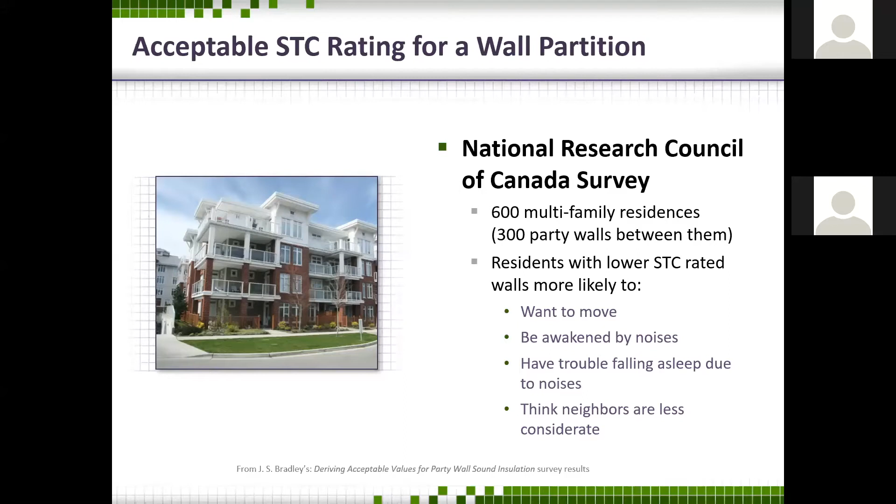The general survey conclusions found that an STC of 55 is a realistic goal, but an STC of 60 is more ideal and practically eliminates negative effects of noises from neighbors.

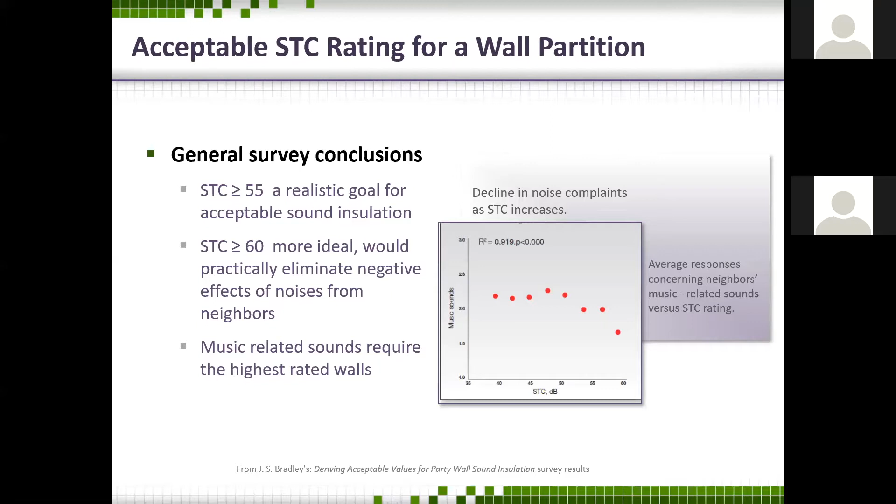So some of the trends are towards higher STC wall partitions. In education, LEED requires an STC 50 for core learning spaces. We know that children learn better with fewer distractions, and adults do as well.

In healthcare, we passed the HIPAA law in 1996, and it completely changed the way healthcare facilities are designed, and it also placed a greater emphasis on sound transmission.

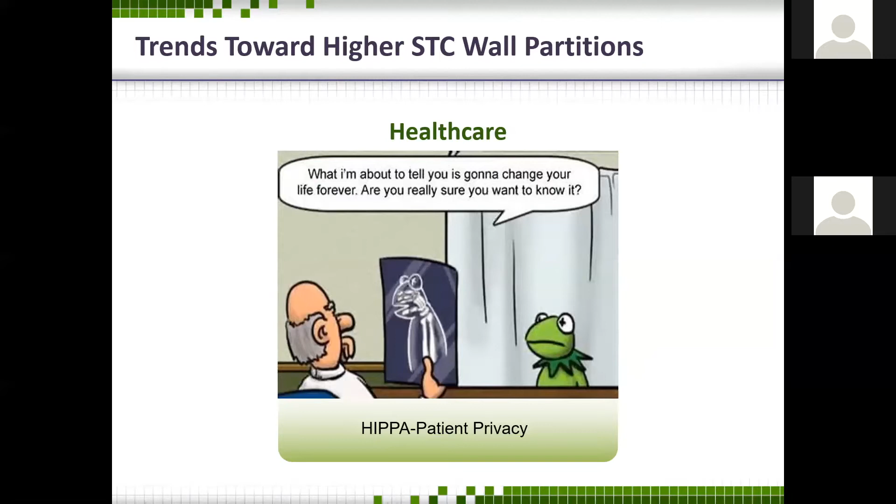The hospitality industry is a very competitive industry, and one of the ways they differentiate themselves from one another is to provide a quiet environment.

I think probably many of you, like our team, traveled a great deal before COVID-19. One of the things I always looked for was a quiet room. If I could hear that television, that flat screen in the room next to me, or people talking, I wouldn't go back to that hotel.

So the key acoustical terms and concepts we're going to talk about: structure-borne sound, airborne sound, Hertz, decibels, flanking sound, sound transmission or STC, and noise reduction coefficient or NRC.

Structure-borne sound is not really what this presentation is about. Structure-borne sound is sound that travels from a source to a receiving space, primarily by solid materials, and it travels much faster than airborne sound.

Our team visited the acoustic lab at NGC Testing Services and experienced structure-borne sound. We stood in a room. Above us was a concrete floor ceiling assembly, and on that floor was a tapping machine. When they turned on that tapping machine, you could hear that sound just like it was next to us.

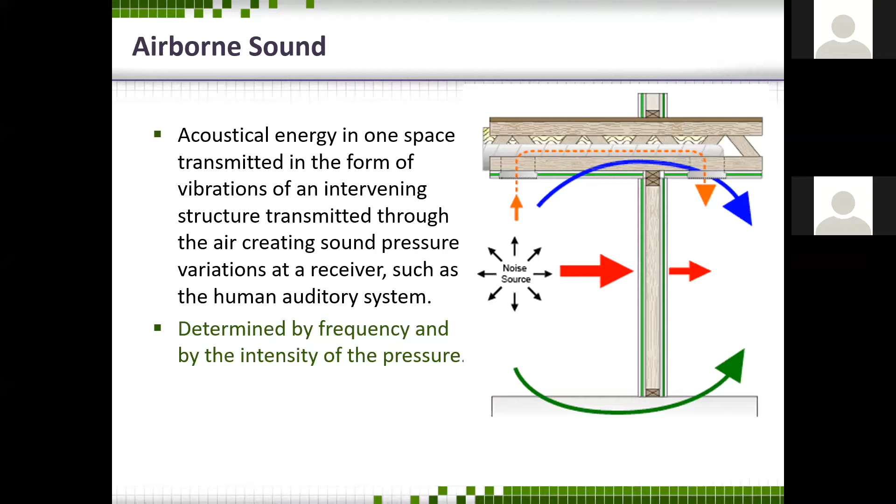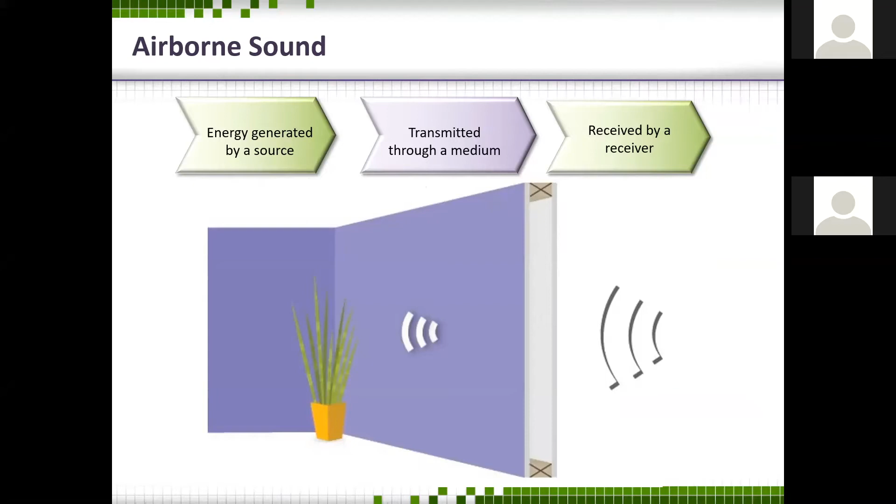The way we hear that sound is by frequency. Here we mean pitch, and intensity of the pressure, or how loud it is. So it's energy generated by a source, transmitted through a medium, and received by a receiver.

The most common measure of frequency is called a Hertz. When we're very young, healthy children, we can hear between 20 Hertz and 20,000 Hertz, but that goes away pretty early. We know that people who are 30 years old and older, the vast majority do not hear 16,000 Hertz and above. Humans are most sensitive to the range of 100 Hertz to 8,000 Hertz, and most typical speech patterns are between 125 Hertz and 4,000 Hertz.

And this is the range that we test for STC. If that sound is below 125 Hertz or above 4,000 Hertz, STC isn't testing for that. Now, 125 Hertz is similar to the low sounding feedback on a monitor, and 4,000 Hertz is similar to that shrieking feedback from a microphone.

The next slide we're going to show you is a very fun video from National Geographic, and it illustrates how quickly adults lose their ability to hear those higher frequencies. You may want to play along and test your own hearing.

We've gathered a group of volunteers ranging in ages from 8 to 71 and are putting them to the test in our first Battle of the Ages contest. All right, you guys, I'm going to play a series of sounds, and if you can hear the sound, I want you all to raise your hands up. Your right hand, you're going to keep it there, all right? For those of you watching at home, feel free to play along. Ready? 8,000 Hertz. All right, all of you can hear that first frequency. Now I'm going to play another sound in another frequency. If you still hear it, keep your hands up. If you can't, bring your hand down. 10,000 Hertz.

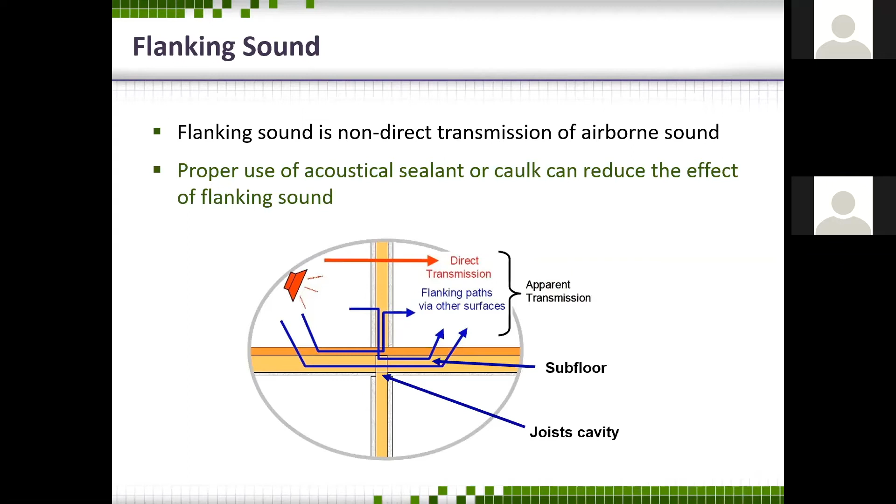So flanking sound. Flanking sound is the non-direct transmission of airborne sound, and the proper use of acoustical sealant or flexible caulking can reduce the effect of flanking sound. We're talking about places like the subfloor or joist cavity. You want to make sure it's a flexible caulking, because as that building settles, you don't want to create gaps where there could be sound transmission.

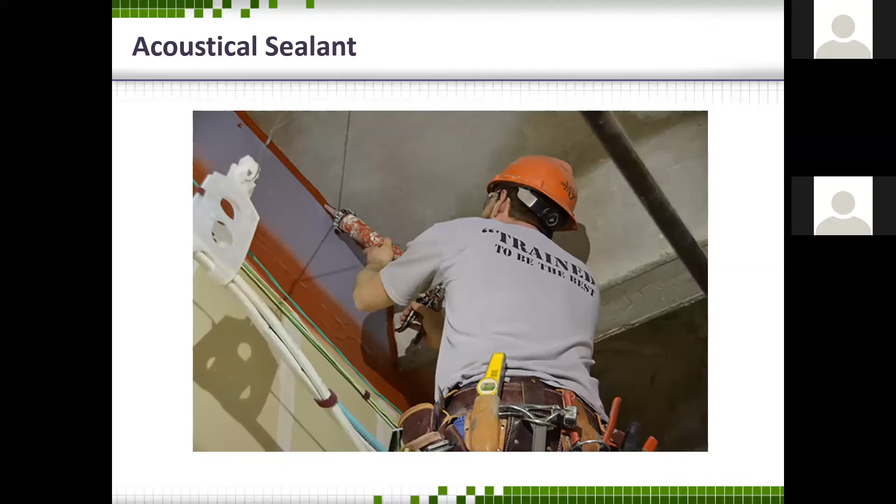So in areas like the perimeter seal, the photo shows a worker applying fire-resistant acoustical sealant around the perimeter of a wall. Thad is going to talk about this more in coming slides, and also at the top of a wall.

So Pat's done a good job of outlining sound transmission classification. Let's dig a little deeper into what it actually is. An STC number is actually a single number. It's a point on a graph in an arc that measures 16 different frequencies, as Pat said earlier, between 125 Hertz and 4,000 Hertz. So if your client or owner is working on a project that's got sounds outside this range, STC really doesn't mean as much as it does when we're talking about normal speech patterns and the way things happen.

Remember also that it's logarithmic, not linear. So again, the lower you are on the graph, a 32 or a 34, that's relatively easy to achieve. When we get up into the 50s, the upper 50s, into that 60 range, we're really creating a heavy lift.

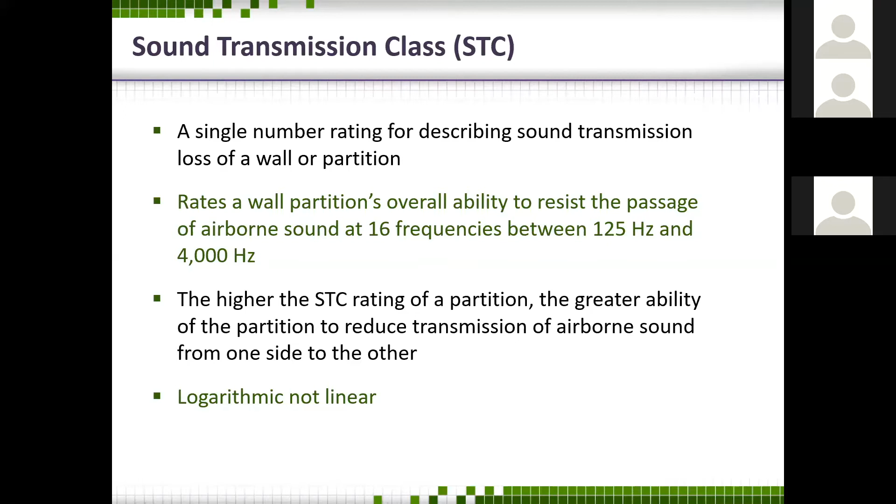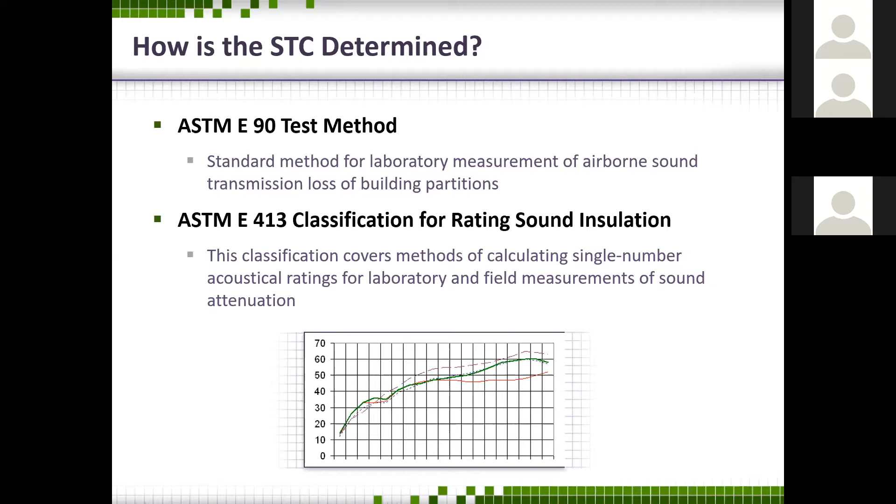From a perspective of how we identify and measure these products, we want to make sure we're comparing apples to apples. So in your specifications and contract documents, please call out products from a sound perspective that are measured by ASTM E90, so we know that all the products you're comparing have started from the same point. And as far as how they're measured, ASTM E413 is the way we classify those within that graph.

We talked a little bit about IIC, we talked a little bit about STC. We're going to spend a minute on NRC - that sound that's built up within a space, the noise pollution that happens within the walls that you're in. For example, we normally give this presentation in a conference room. Conference rooms are designed with typically carpet or softer materials on the floor, the side walls, maybe even a ceiling tile. You've got bodies in the seats, cloth seats as a rule, something more comfortable for a longer period of time to sit for an hour or so to listen to a presentation like this. Sound in those areas is designed to bounce back and forth 2.5 to 3 times before it dies out.

That's exactly right for auditory presentations. Now, let's say you were talking to somebody in that particular room and you moved over to a bathroom in the office. When you move into that space, those walls are typically hard surfaces designed to repel water and protect against water. At that point, your voice is starting to bounce back and forth 6 or 7 times before it dies out.

It might even create enough of an echo that someone would say, "Where are you at all of a sudden? You sound different." This can happen inside a building. It can happen outside of a building.

So we've got a small video here to show the effects of what can happen outside a building when we have NRC challenges. And we're going to use one of the most famous speeches that I think has ever been made by a sports figure.

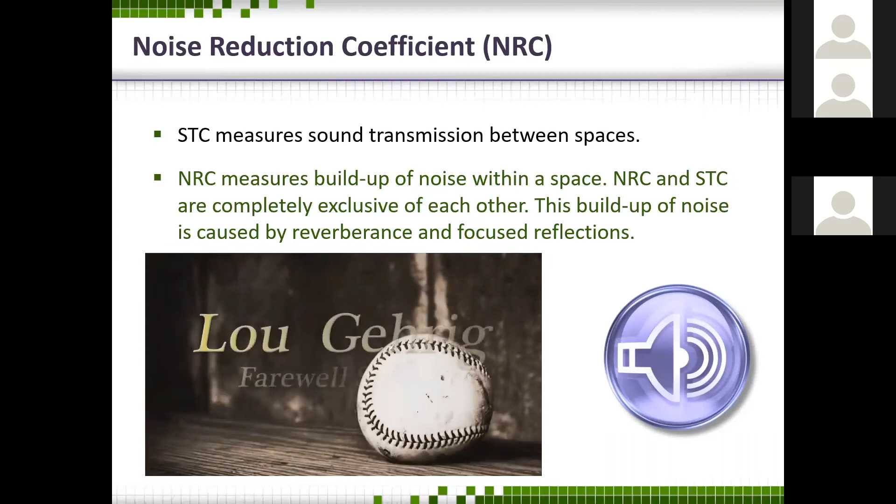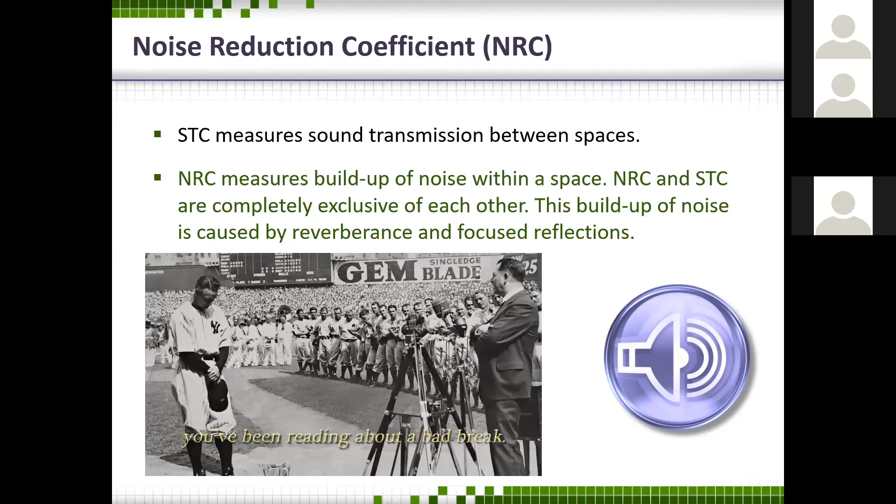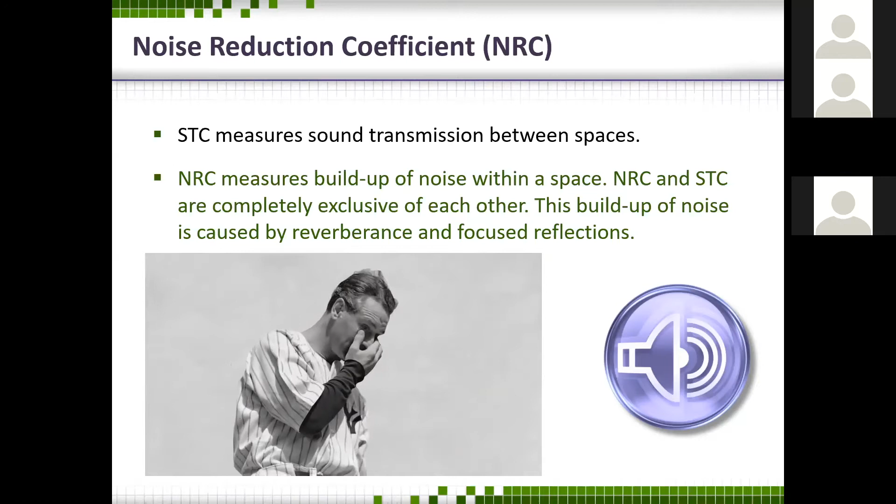For the past two weeks, you've been reading about a bad break. Today, I consider myself the luckiest man on the face of the earth. That I might have been given a bad break, but I've got an awful lot to live for. Thank you.

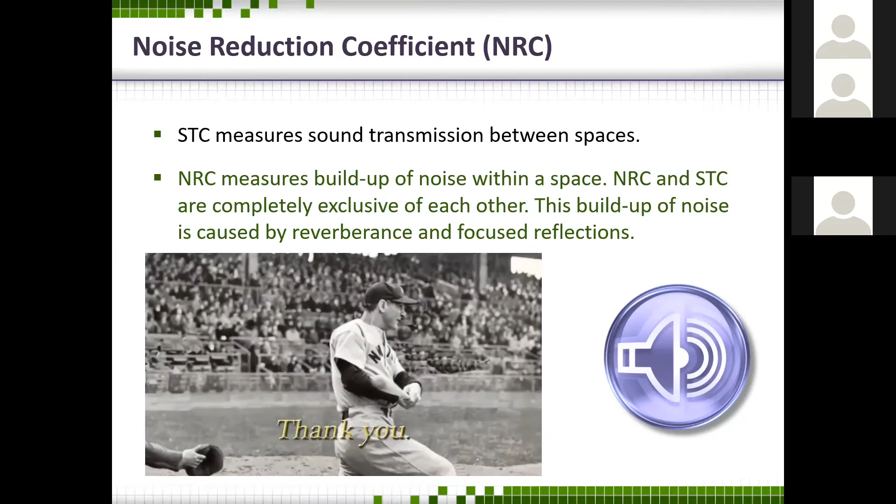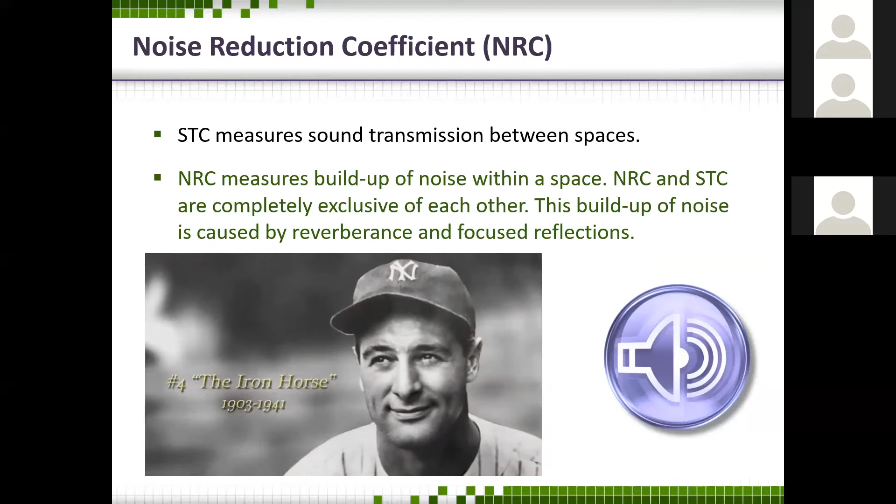Gehrig was one of the most famous Yankees in a long line of famous Yankees to ever live. And if you're not familiar with what happened to him, he got ALS disease and had to retire at an earlier age. He did everything he did with grace, including deliver this final speech.

So I'll give a shout out on the East Coast to all of our New York members. And I'd be remiss if I didn't at least talk, since I've got Pat on the line, and remind everybody that the Dodgers won the series.

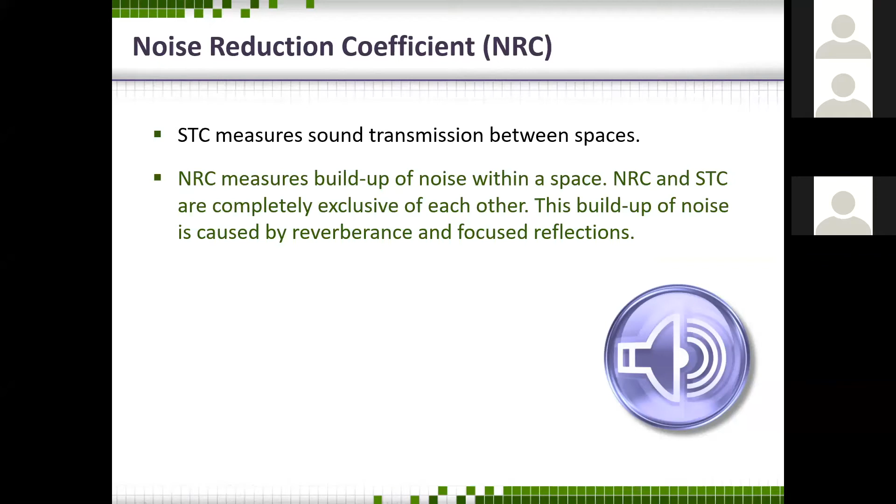So as we talk about design considerations, we're going to move to the part in the presentation where we talk about how we protect spaces from one another.

When I give presentations in downtown Chicago, for example, if I'm in an office where the L is moving across that room at some point, it's kind of hard to change that public transit system. We're not going to eliminate that noise. So how do we deal with that?

Well, you can employ materials that absorb sound rather than reflect it. While that's not huge for STC, it does help reduce the volume of sound as it hits the wall, which can help slow things down.

When we have design considerations, we also use a topic called sound masking. An example of that is, let's say you're in a hotel room like Pat talked about earlier, and you can hear the low thump of that, maybe that movie that somebody's watching on the other side of the wall.

Many of the HVAC units have a constant fan mode, and you can go switch that on, and that constant hum of that fan can drown out the noise from the other side. That's called sound masking. And as adults, we typically can get accustomed to that sound and maybe even fall asleep to it.

Then sound barriers is probably the most common way that we think in the architectural community about how we control sound from one side to the other. And that's basically creating something that goes in the way to slow the sound down.

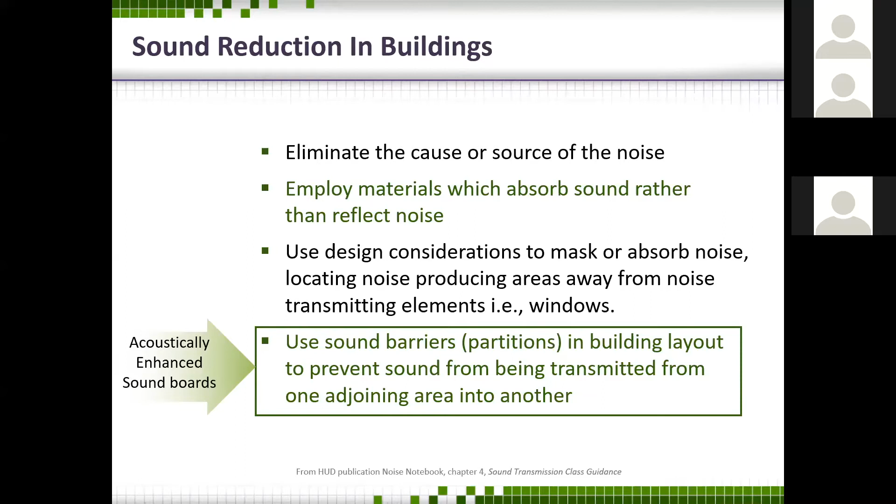Now, there are three things that control sound: mass, stiffness, and damping.

Mass, pretty simple. I do presentations, like I said, in Cincinnati, downtown Chicago, areas where maybe there are buildings that were built pre-1900 that used two and three courses of block, brick, and they'll actually slow things down. It's almost like a tomb when you get into some of those areas, because you've got mass, a tremendous amount of mass holding whatever sound bounces around that room from getting out to the other side.

When we talk about a drywall partition, there are some unique factors we need to consider when we think about how that sound travels from one side to the other with the mass products that we're using in today's world.

A 25 gauge metal stud, 24 inches on center, does a couple things. That 25 gauge stud is soft enough and resilient enough that when sound vibrations hit it, they'll move a little bit and they'll start to deaden that sound out as it moves from one side of that partition to the other.

When we move to a stiffer stud, let's say a 20 gauge stud, 16 on center, instead of 3 contact points in that 4-foot space, we have 4. Think of thermal bridging—there are just more opportunities for things to travel through it. And because it's stiffer, the sound tends to telegraph more easily. So understand that a 16 on center wall that's 25 gauge, or a 24 inch on center wall, will far outperform a 16 on center stud wall.

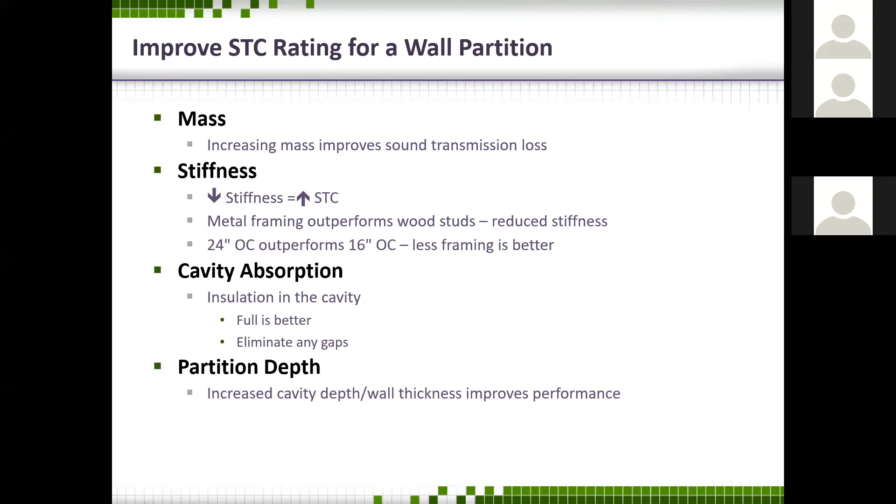And then dampening is a little different—we'll talk about it more later in the presentation, but for now, think of it like this: you have an empty wine glass, you ping it and it rings, and you put your hand on it and it stops. That's essentially what a damped panel does.

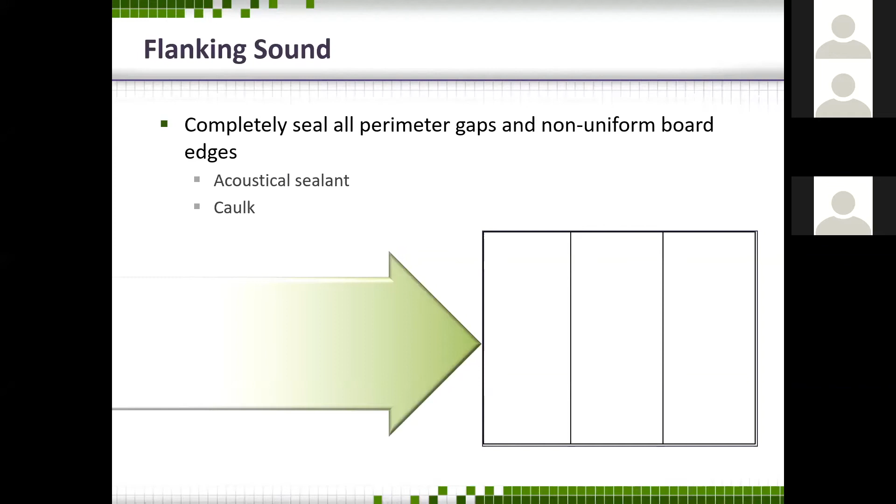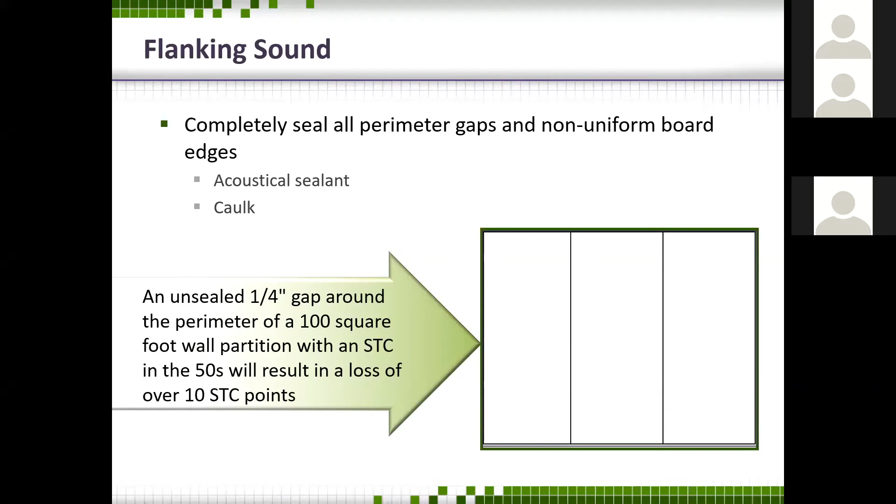As Pat talked about, showing some of the different flanking paths, your system is only going to be as effective as its weakest link. In many cases that can be a window or a door, but even in a solid wall, you still have the opportunity to lose over 10 STC points if it isn't acoustically caulked correctly.

One of the most common areas of misdirection between the person putting up the drywall and the person putting up the floor trim is who's actually responsible for installing the bottom part of that trim. Traditionally this isn't something the drywall contractor or Division 9 contractor is asked to do. GA 216, the Gypsum Association's document, asks that we keep drywall off the floor so we don't wick water or have moisture issues. By the same token, once that drywall is done, we're far from finished with that unit or part of the building.

There's going to be a lot of other trades walking around, floors that need to be swept or cleaned up regularly, so putting a non-hardening acoustical sealant in there isn't probably in your best interest at that stage. But before the trim goes up, that's one piece of the puzzle we need to solve, because sound will pour underneath that wall if we haven't done it. This is an excellent best practice.

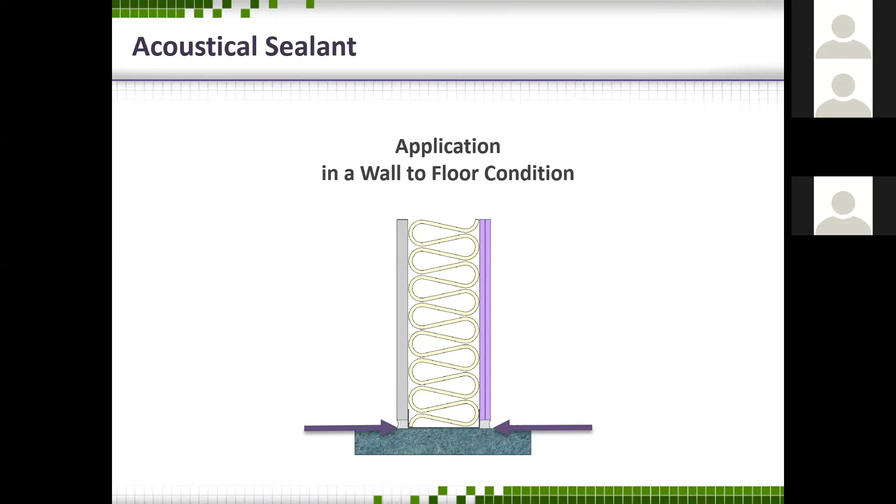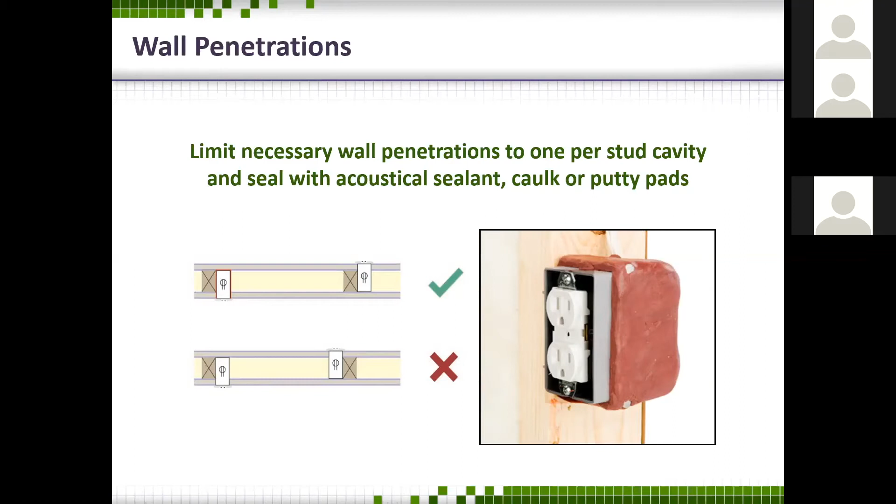One additional way to help control that is to wrap the box with sound putty. The putty pads are relatively inexpensive. Here we have a marketing picture of one that's very well put together. It just looks really nice.

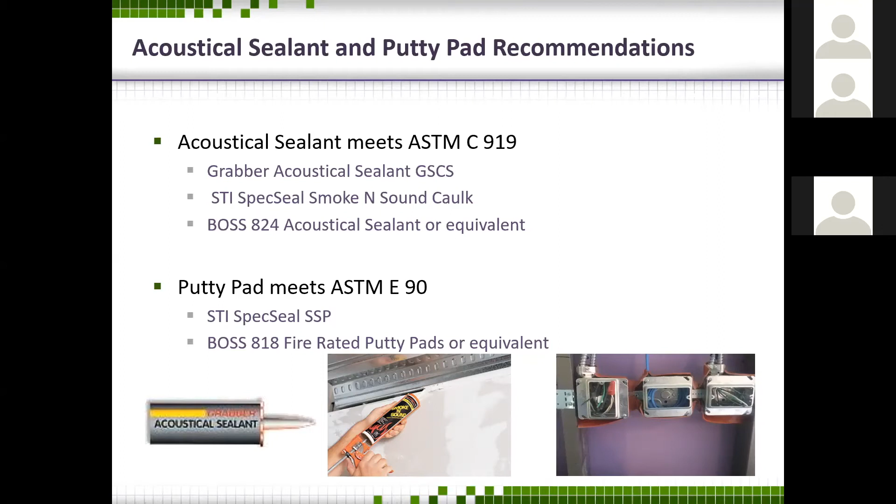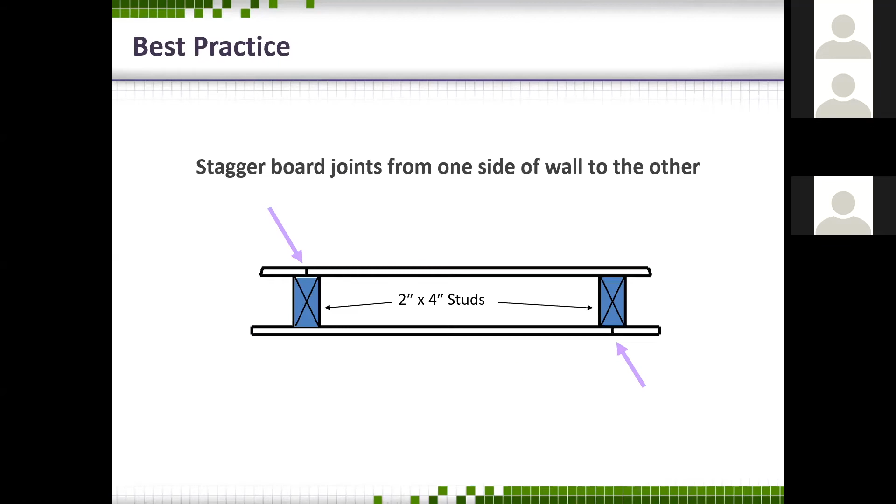There are several existing solutions for how we make this work. Probably one of, if not the most popular, and one that's been around for over 60 years now, is the unbalanced RC1 wall system. This uses a combination of two of the things that I talked about earlier that control sound: mass and space.

Now I could spend another hour talking strictly about RC1 channels, how many of them are different and react differently, and that's for another presentation. But I'd like to spend a minute talking about the front end of the job and the back end of the job.

The front end of the job is what we do. This is where we specify the product, we bid the project, we get the right contractor on the job, we do our CA work, we have an opportunity to see how it goes up, we have a good contractor on the job, and everything goes right.

The RC1 is put up with the right size screws so we don't short circuit it. We make sure that they're the right side up and not the wrong side down. We make sure that the RC doesn't touch other members of the wall on the other side. We get everything done correctly, and it's a perfect wall in construction, as good as we can get it.

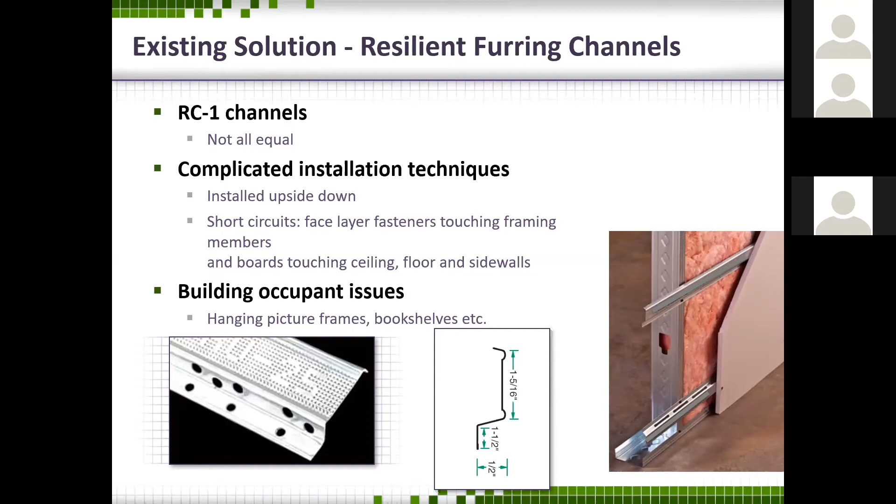One way to compromise that system and still get some of the effects is to use a common header and footer and stagger the studs. In that particular case, you still get increased STCs over a single wall assembly, and you've taken up a little less space and used a little less material.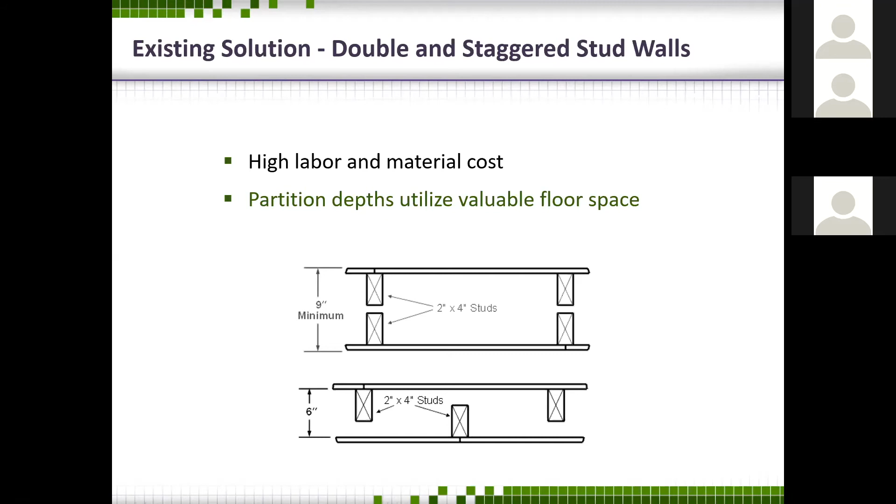We give this presentation all over the country, and for some of you this is something you may have never seen. But I grew up in the construction industry, and in the 60s and 70s, when the legacy codes were all around the country and the IBC and IRC had not been formed yet, different parts of the country used this in wood frame construction, especially multifamily, as a great way to improve sound in demising walls. Wood fiber boards on both sides of the wall.

As we moved to the IRC and the IBC, where we had a standard 50 STC, this fell out of favor in some areas because it only gets to a 49. It's still used in several different parts of the area. I see it some in northern Michigan, in the Southwest, Southeast. There's places where we see it specified still, so we know it's out there and we still like to talk about it.

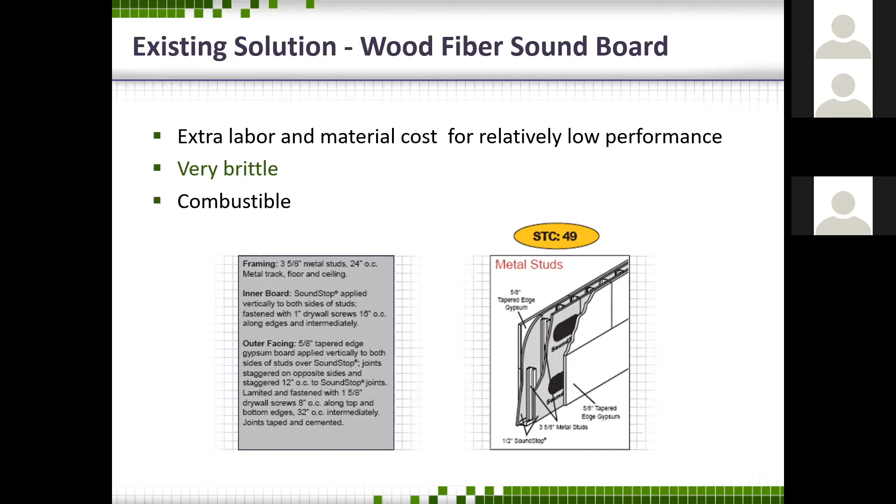We just want people to understand that we've gone from a 32 or a 34 in our wood frame construction on a load-bearing wall, which is a low STC. We've gained a tremendous amount of space when we get to 49, but we're not quite to where legally a lot of owners are responsible. So if they have this requirement, you just need to be sure what you're recommending that they do.

Another great option is a sound clip, or RSIC clip, as it's commonly known in the industry. Great opportunity to start to deaden out sound because you take a stud and you've got a pneumatic pad on that clip and you attach it right to the stud. So you've got sound deadening qualities there. You've also got a channel to give you some more space, and some sound dampening qualities there.

In this particular wood framed wall that's shown, a 57 is a fantastic STC. We tend to see this in multifamily, some of the higher end multifamily units, and we also see them in music facilities because they control a wider range of sound. It's a great product, a nice system. It's a little more expensive than maybe some of the other options we've talked about because those clips are between $5 and $6 a piece. So just understand that while it gives you excellent performance in a wide range of frequencies, you also might need to prepare your owner for that gulp moment when he gets the bids back.

Just another option.

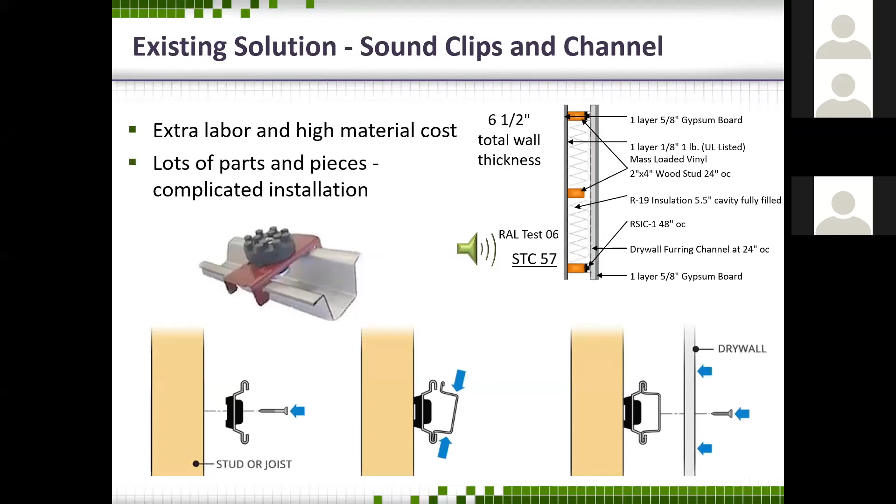So another option for achieving higher STCs is your damp panel solution. This is the acoustically enhanced gypsum board. It's a 5/8 inch Type X mold and moisture resistant paper faced board. The paper is also abuse resistant. The core is silicone infused for additional mold and moisture resistance, and it's also extra dense. Thad talked about density helping increase STC.

What you see here is 2 layers of 5/16 inch extra dense core with a thin layer of viscoelastic polymer in the center. Constrained layer damping is when you take a viscoelastic material and it's sandwiched between 2 stiffer materials. It was developed in the 1930s and is used by the aerospace and military, so it's a proven technology. How it works is the viscoelastic polymer absorbs and dissipates noise by converting the vibrational airborne energy of sound waves into negligible heat.

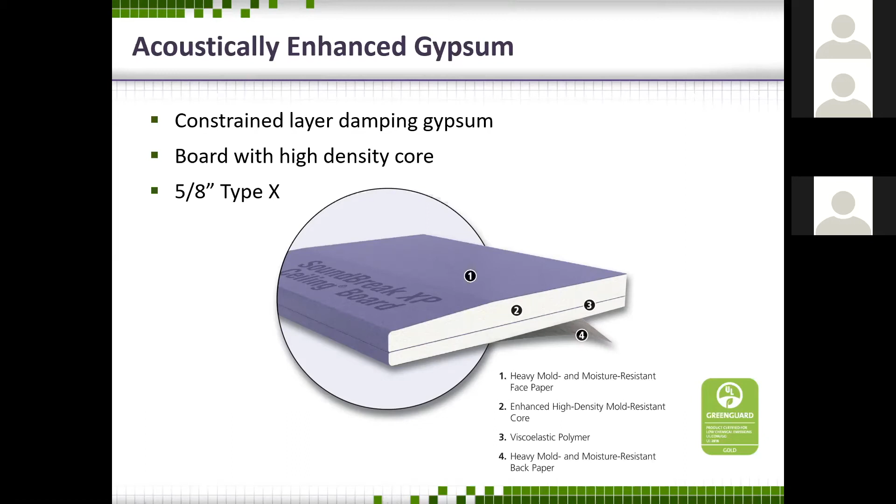Some of the advantages of using acoustically enhanced gypsum board: first of all, it is a single layer application. It's the same thickness as standard drywall, but you can achieve much higher STCs, so it is maximizing your floor space. The focus is on speed and simplicity.

It installs just like standard board, and it finishes just like standard board, so you're not asking your drywall installers to do anything they're not familiar with. And then it can also be used in conjunction with other sound damping techniques when you want to achieve a higher STC rating.

So the 2 details that you see at the bottom of this slide were taken, the test was done at NGC Testing Services. Both of the details or the assemblies are based on U465, which is a generic, very common 1-hour steel stud assembly. Next to it is V438, that's a proprietary umbrella design, 1 to 4 hours.

We took a layer of 5/8 inch Type X board on each side of the assembly. You have 3 5/8 25 gauge steel studs 16 inches on center. Remember Thad talked about less framing is better. This is 16 inches on center with 3.5 inches of glass fiber insulation. In the lab, this tested to an STC of 43.

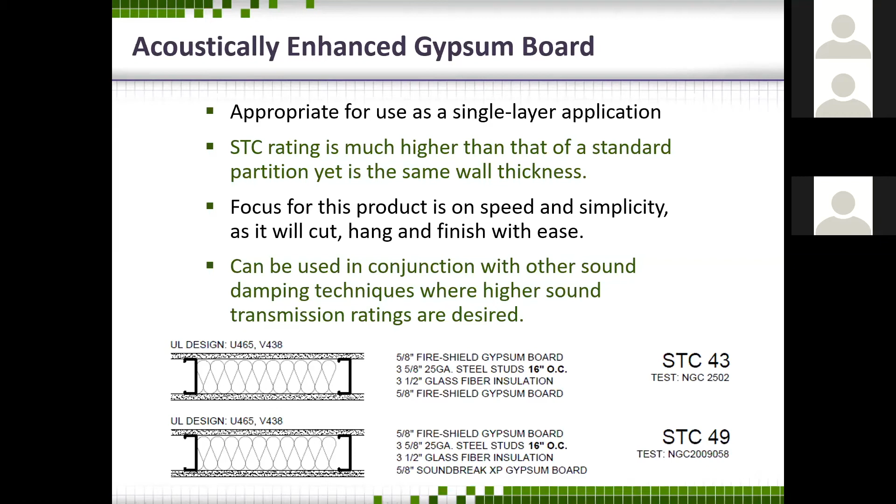So we're going to talk about codes and third-party recommendations. The International Green Construction Code Guide recommends two grades of acoustical performance beyond the current code minimum. In the lab, a preferred performance grade A occupancy, STC of 60, an acceptable performance grade B occupancy, an STC of 55. Now we drop 5 points when we get to the field, and that preferred performance is a 55 STC, and an acceptable performance for grade B, a 50.

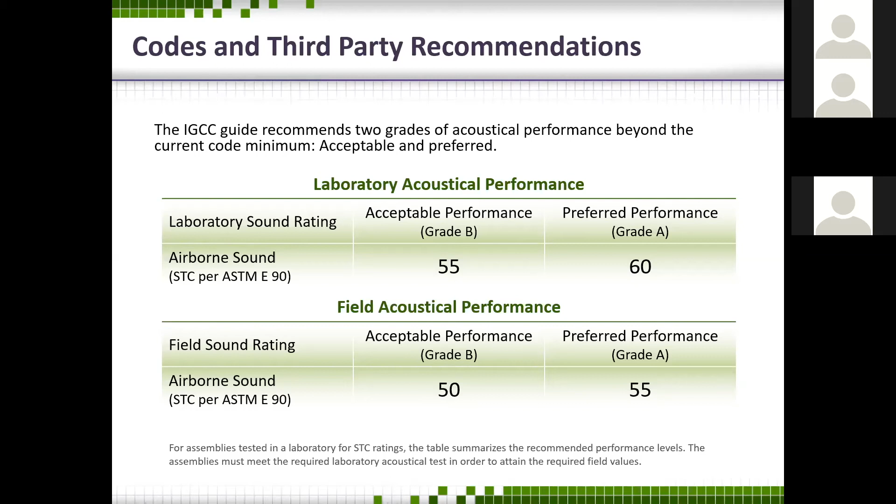The American National Standards Institute chart lists the STC ratings required between rooms that separate a core learning space from an adjacent space. A learning space, therapy room, or healthcare room next to a core learning space, an STC of 50. Next to a bathroom, a 53. A core learning space next to a corridor, staircase, office or conference room, an STC of 45. And a core learning space next to a music room, auditorium, mechanical equipment room, or cafeteria or gym, an STC of 60.

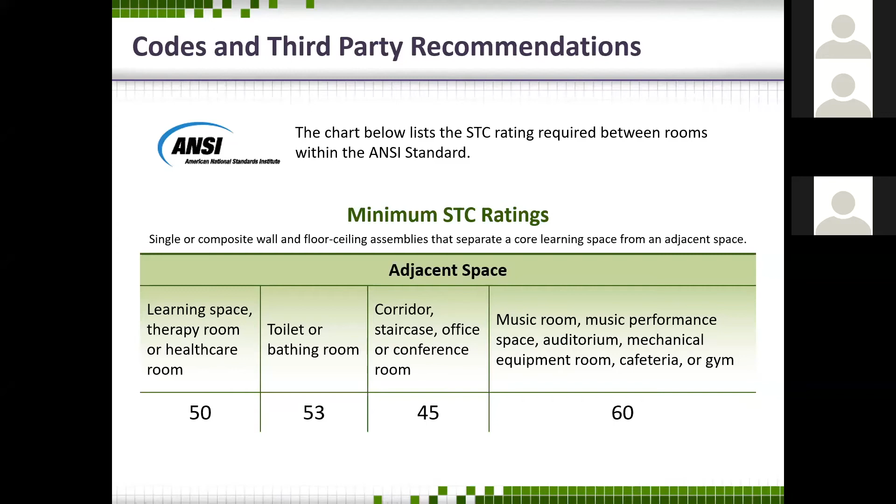The Academy of Architecture for Health references the guidelines for design and construction of hospitals for their minimum design requirements. So the adjacency combinations: a patient room to patient room between a wall on the same floor, an STC of 45. A patient room to patient room, floor to floor, is a 50. Patient room to corridor, an STC of 35, because we keep those patient doors open for line of sight safety. Exam room to public space, an STC of 50, and patient room to MRI room, a 60.

And then finally, LEED version 4 and LEED version 4.1 offer one possible point, 2 for healthcare, for acoustical performance in the indoor environmental quality credit category. So adjacency combinations, if you go halfway down: standard office to standard office, an STC of 45, conference room to conference room, an STC of 50, and then mechanical equipment room to occupied area, an STC of 60.

So far in this presentation, we have thrown a lot of information at you. We'd like to wrap up with ways that you can have some cost comparisons with some of these different systems. So we took some of the most popular, and we started to compare them from a cost perspective.

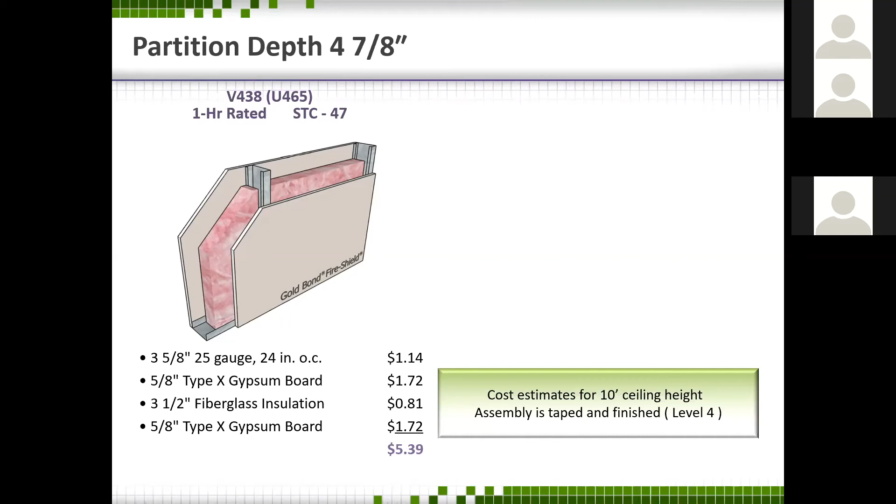We're going to start with our unbalanced RC1 wall. As I said earlier in the presentation, this one's been around for 60 years, and it's probably the one we see almost as often as anything else. It's very, very popular. So let's look at the top slide and look at some of the differences.

Just a quick comment here: anything you see in the laboratory, you probably will not ever achieve in the field. As a matter of fact, if you look in the code books, and any of you that have ever talked to or fought with a code official, you know they're pretty stringent with what they do and say. If you look in the IBC or the IRC, in those two paragraphs outlining code requirements, it says 50 lab, and in parentheses, 45 in the field. So there's an expectation that in the field you can lose up to 5 points and still be legally bound and within the guidelines.

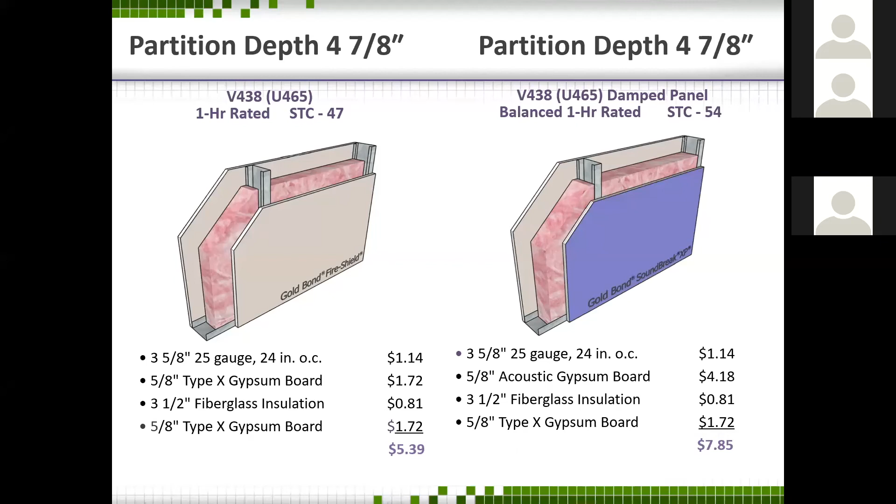Now, we talked about a damped panel being a thin wall application. So we've taken all those pieces and parts away in this slide, and we've taken one piece of 5/8 Type X out and put one piece of damped panel in there. You'll see the significant reduction in cost: we went from $903 to $785 because we don't have as many pieces and parts. You'll notice the acoustic board is more expensive, but there are fewer pieces and parts and less labor to put it up, so labor is where the major savings come from.

We struggle sometimes with this particular piece of the equation when we talk to contractors. They typically tend to price all these systems out exactly by the piece, and when they get to talking about the cost of an individual product, they go, wow, this is really much more expensive. But they tend to forget that sound is an assembly cost, and we're creating an assembly to get where they need to be.

Notice as we move up the graph, we've gone from a 50 to a 54. So you've had less cost and gained 4 extra STC points with the damped panel solution. You're getting bang for your buck in two different ways. The third piece of the puzzle I'd like to call your attention to is partition depth, which stays the same because you're taking out a 5/8 product and putting in a 5/8 product.

If you don't remember anything else I said today, please understand that this sound solution is a great plug-and-play model when you're in the middle of a job. If you're a CA person or in construction, and an architect or owner is changing the rules on you mid-job—say the CEO wanders through once the drywall is up, which is when things get more visible and real because they can see the wall partitions and can't see through everything—and they say, 'well, I really don't want my office on this side of the building.'

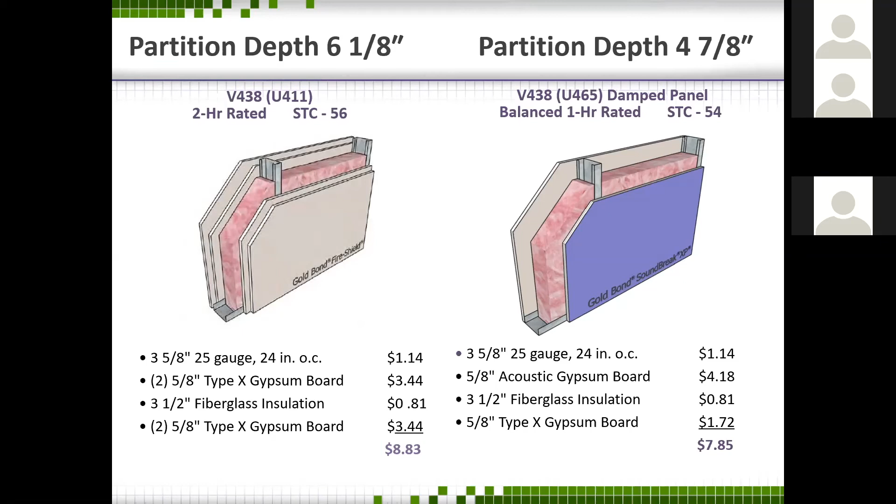In addition to that, let's remember what I said about a double partition wall where you've decoupled it in the middle. Your range of frequencies that are going to give you protection in that 60 is going to be wider than the one on the right-hand side where you've got single wall construction. All good reasons to be able to move to traditional 4 layers. Until you get to the top and you say, okay, what's the most important thing for your owner? Is it space or is it cost? Because it's going to take up an extra 3 inches of space.

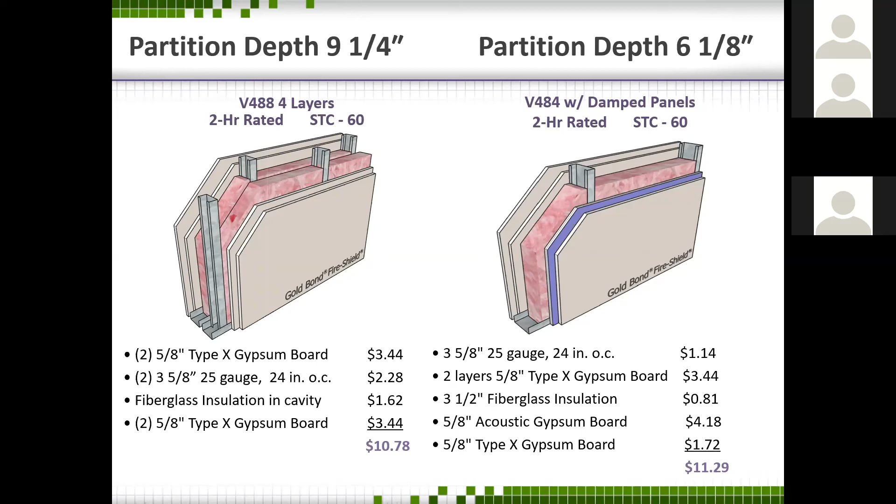So again, we're not advocating one way or the other here. This is just to educate you on some of your options and what some of the costs are going to be. And hopefully today we've had a chance to do that for you.

So as we start to wrap up, we think about the fact that over the past 10 years, gypsum manufacturers like ourselves have moved from getting about 95% of our calls for fire protection and ways we fire protect members, framing columns, members per people in the buildings, to the point where now we get about 45 to 50% of our calls having to do with sound and how to control sound pollution in different types of products and buildings. LEED obviously works with healthcare, and with LEED 4 and 4.1, as Pat talked about, that acoustical credit that used to be specific to schools has extended to other parts of the building and the built envelope.

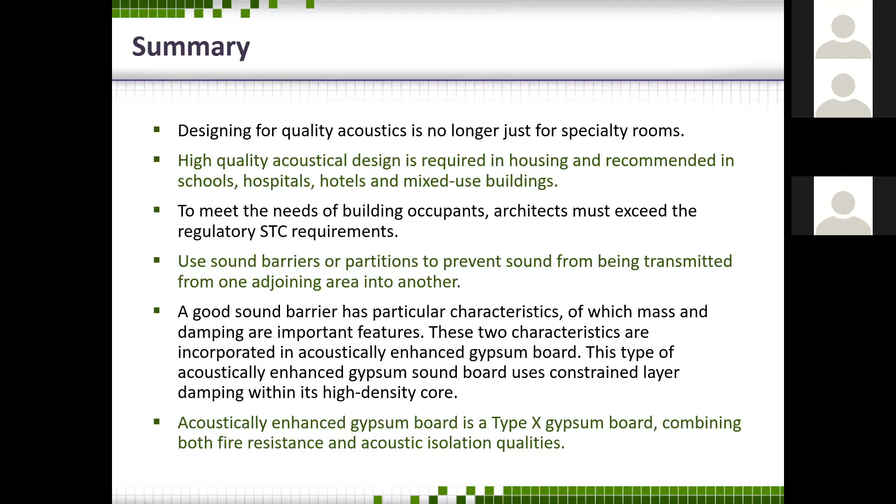Meeting the needs of your STCs, we've wrapped up several different ways for you to do that. We've introduced you hopefully to an acoustically enhanced gypsum board that's a true Type X, and it helps contain both that fire resistance and those acoustical qualities to give you another notch in your gun, another bullet in your chamber.

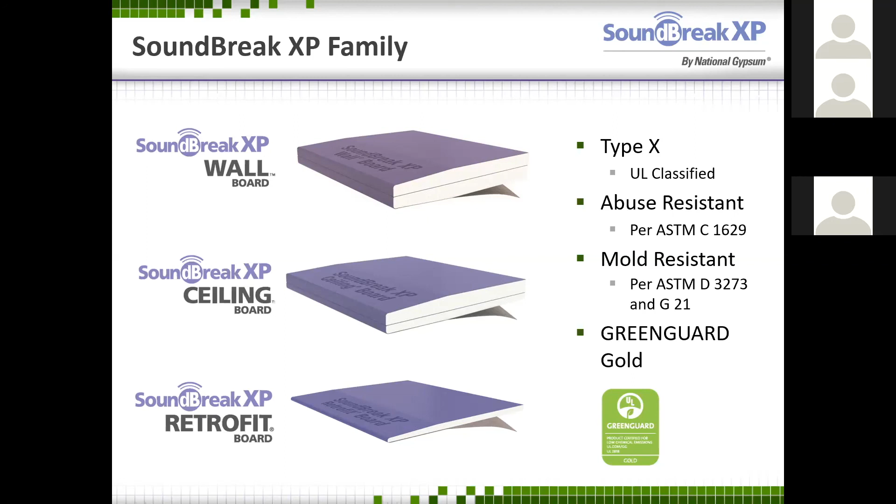They are mold and mildew resistant. They can meet a perfect 10 on the ASTM 3273. We have a ceiling board that's excellent for floor ceiling assemblies, giving you some extra protection from IIC and STC. And then we have a retrofit board where if you have an existing job with a tenant that moves in unhappy with the way sound works, or somebody that's decided they want extra protection. We've had a couple casinos come to us and say, hey, we thought we did everything right, but we've got 200 rooms where we need some help. We can give you a product that adds extra STC right on top of the walls you have without demolition costs. These products are GREENGUARD Gold certified, so we can help with your sustainability needs.

As I talked earlier, our XP boards are perfect for incidental moisture, and we've got a complete line of them. When we get into more extreme situations, we have our EXP, our interior extreme, used in pre-rock applications. We have our tile backer products that can be used in lieu of a cement board in many applications. We have our shaft wall liner for unconditioned spaces in the lifetime of a building. And of course, our exterior sheathing and glass mat sheathing has been popular since the 80s.

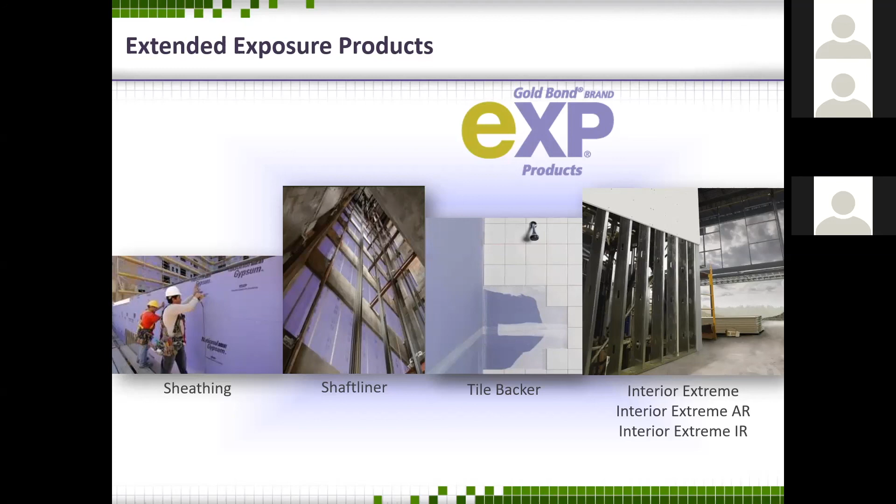Again, just to dwell quickly on our PermaBase, a couple things that give it an advantage over some of the other ASTM 1325 products out there: we have a patented EdgeTech reinforced edge for easy nailing between stud spaces. And then we have a cementitious core that is intertwined with styrofoam beads that make it the lightest weight cement board in the industry.

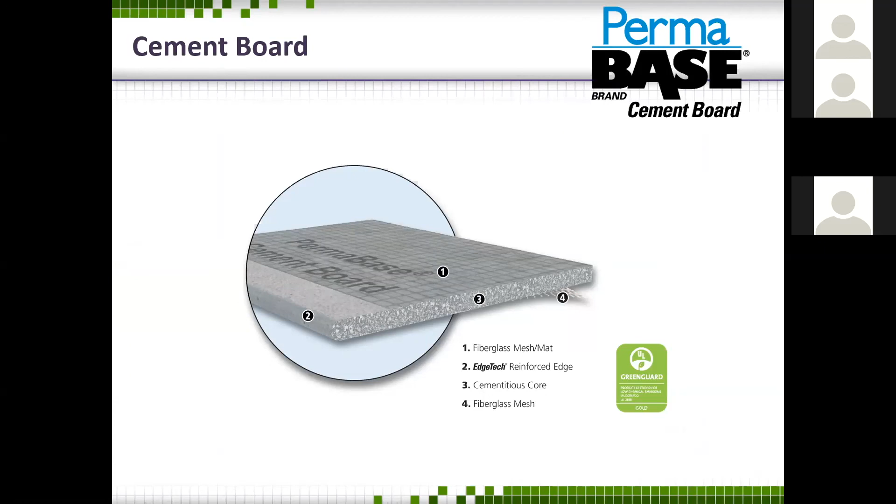The Purple Book 2 was put together by a young architect we have on staff. When he came to us, he said there's all kinds of testing for different wall assemblies, but not very many resources for how these assemblies go together. So he took on that project and has done a wonderful job.

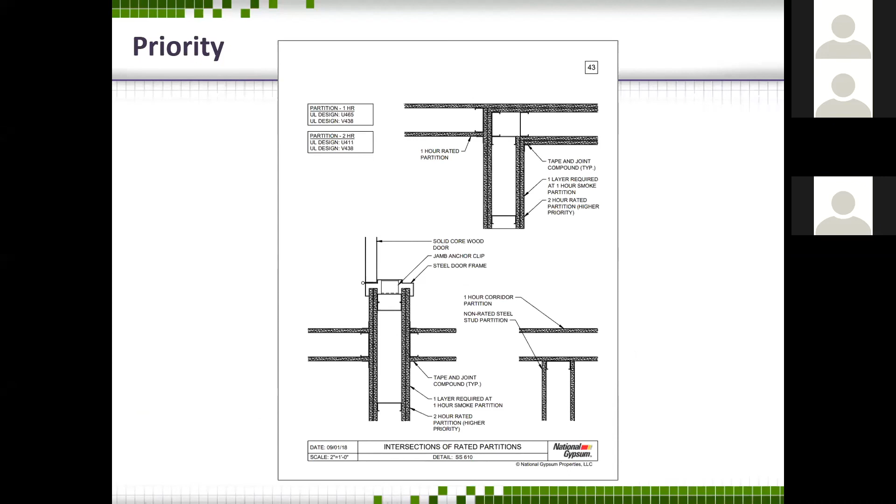We have priority legends. If you're specifying a 2 hour wall that joins with a 1 hour wall, or a 2 hour wall that goes in between a 1 hour wall, how should that be detailed and what should it look like? If you've got static or dynamic head of wall details, how should that be detailed and what should it look like?

We've spent a lot of time talking about sound in this presentation. Our new SoundBook 2 has another 45 different wall assemblies. So if you have the SoundBook and it doesn't have the 2.0 on it, please let us know and we will get you an updated copy.

Download one from the website, our landing page, or our design center. And we've added some new ceiling assemblies as well as some retrofit assemblies.

The way it's laid out in the book is 16 on center assemblies, 24 on center assemblies, wood frame construction, and then chase walls and shaft walls.

These particular pages will have 4 assemblies on each page, and you'll be able to quickly flip through. And because we're in a visual world, we're all visual by nature, we wanted the opportunity for you to see what you think you're building. So you look at this particular graphic and you go, okay, here's what I think it is.

Down below, we actually have the framing and the insulation and everything laid out so that you can see what you think you're looking at is actually what you're seeing.

There'll be a UL number and reference on it if that's the case. If they have one, there'll be an STC number so you can quickly identify it. And as we've talked about in this presentation, oftentimes you'll be working with an acoustical consultant who will ask how this product performs at a certain frequency your owner is interested in. Well, we can give you a test number and you'll see different test numbers there.

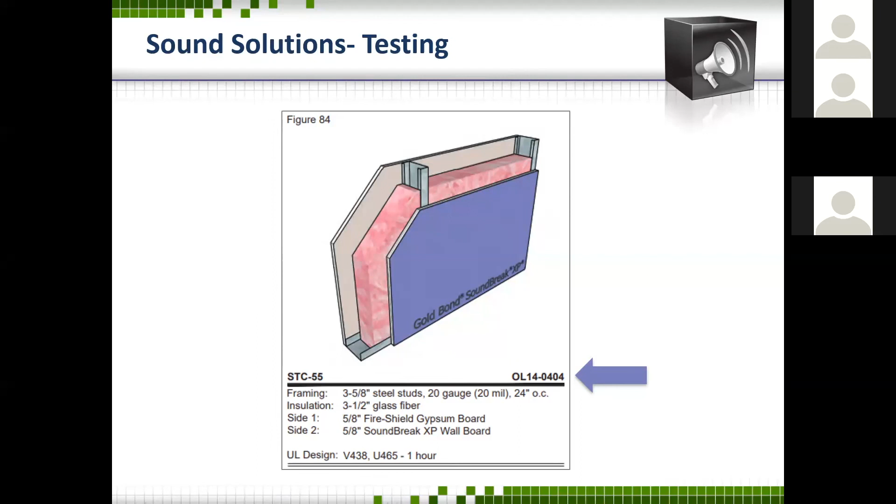There's NGC Testing Services out of Buffalo, New York. You've got Orfield Labs out of Minneapolis, Minnesota, and in the Chicago area, we've got Riverbank Acoustical Labs. Those are the 3 independent testing labs that we use.

NationalGypsum.com is where you're going to find your resources. You want to click on the Design Center and you'll find our specifications there, information about our continuing education courses, all of our sustainability information, and the technical books we've just been talking about.

National Gypsum Company is committed to transparency and sustainability. All of our products are certified either Green Guard Gold or Green Guard. We have HPDs, which are Health Product Declarations, EPDs, Environmental Product Declarations, and Declare labels. We are also listed in Sustainable Minds and Mindful Materials, the databases for looking up sustainability.

Our specifications you'll find on our design center. We have 3-part specs and drop-in specs. We also have links to BSD SpecLink and to ProductMaster Spec.

I mentioned this team before. This is the 1-800 team, the Construction Services Department. They are available to answer technical questions about sound-rated assemblies, sound, and construction, 5 days a week, Monday through Friday, 8 a.m. to 4:45 p.m. East Coast time.